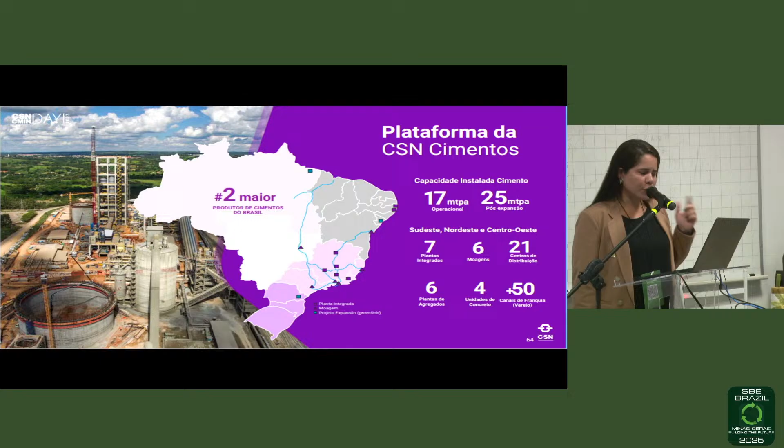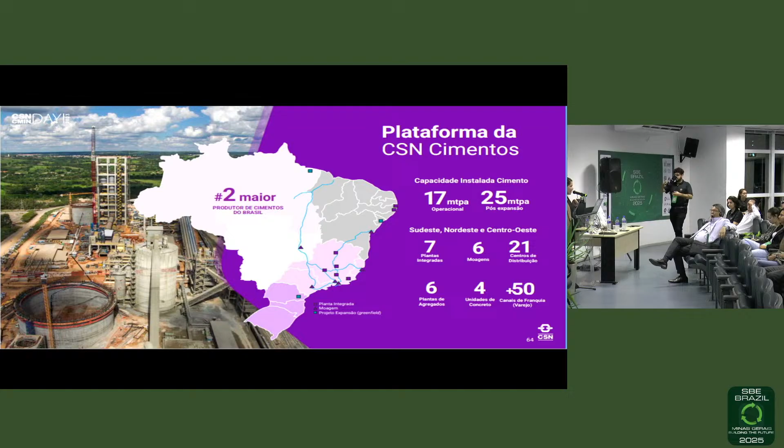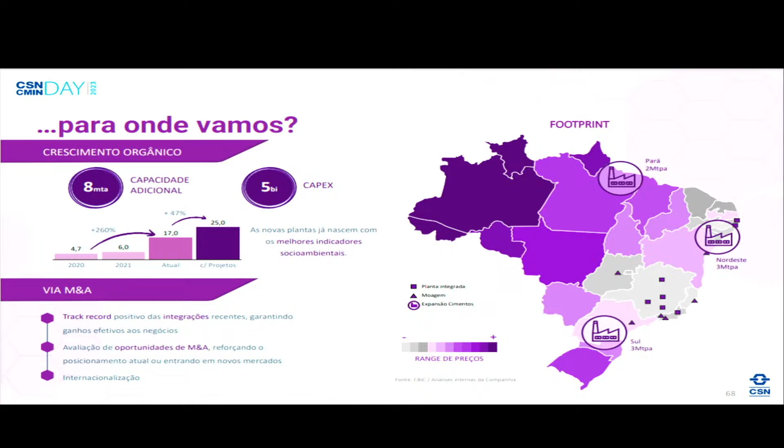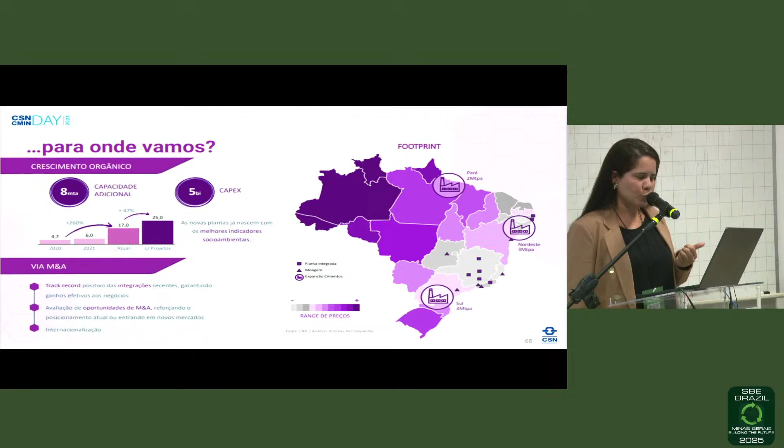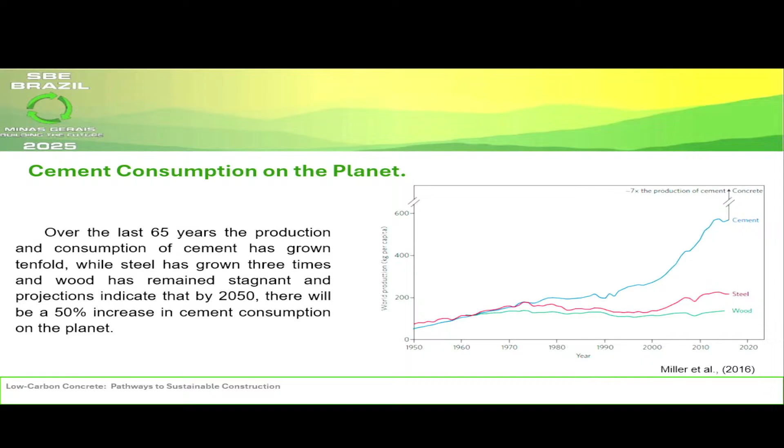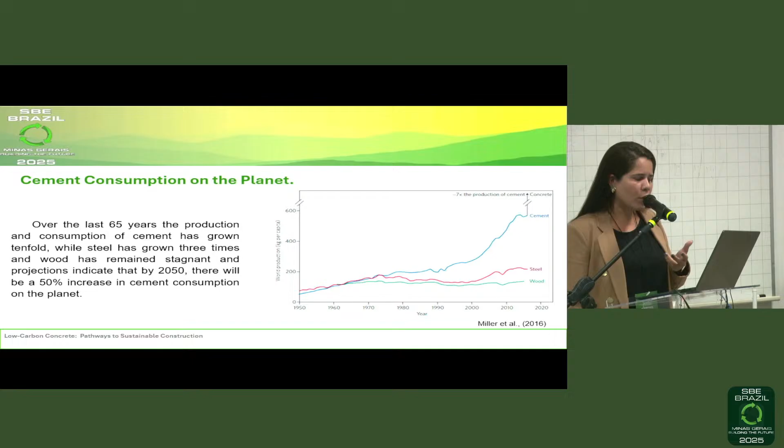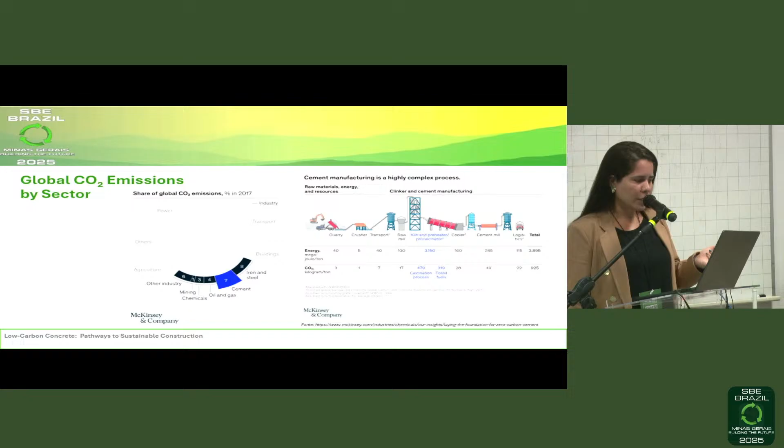Here we have a graph that shows the emissions per segment, the emissions of CO2 per segment, and it shows that the cement segment is responsible for 7% of global CO2 emissions. Mainly, in this case, we're talking about CO2. And this matter of CO2 emission is inherent to the production process of cement.

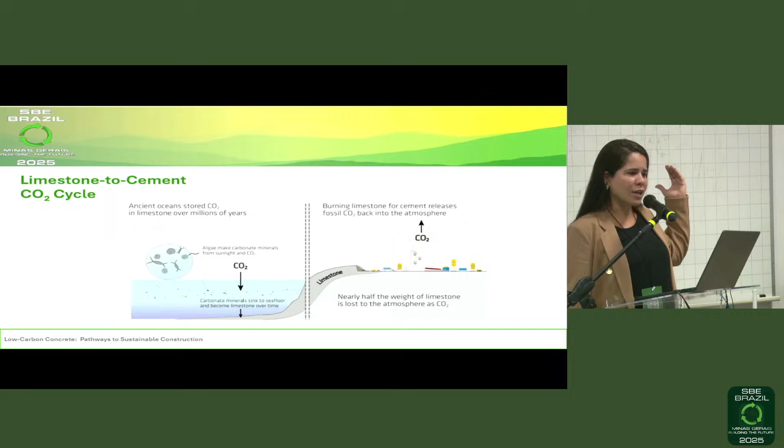For a very long time, algae absorbed CO2 from nature. It was deposited in the seabed, and over time we created layers of limestone. Over time, human beings came and saw that by calcinating and decarbonating that limestone, we were able to make cement. So in the production process of cement, a big part of the CO2 emission comes from this carbonized material being emitted back to the atmosphere.

If you look at this chart, we see that 50% of the emitted CO2 comes from this carbon being released and thrown back to nature. This is very difficult because we have a limitation to reduce these emissions. We have to take attitudes to neutralize these emissions, seeing that nowadays we don't have any other material produced at the same scale as cement to supply the national and the planet's demand.

Nowadays, we do not have another material that's scalable the same way cement is. So nowadays, we're trying to neutralize the emissions that the cement chain brings us.

Data from ABCP shows that 2.6% of total emissions from Brazil come from the production of cement. And we have projections that there will be an even bigger increase in demand for building. Many people are moving to cities, we're developing cities, so there will be an even bigger demand for cement.

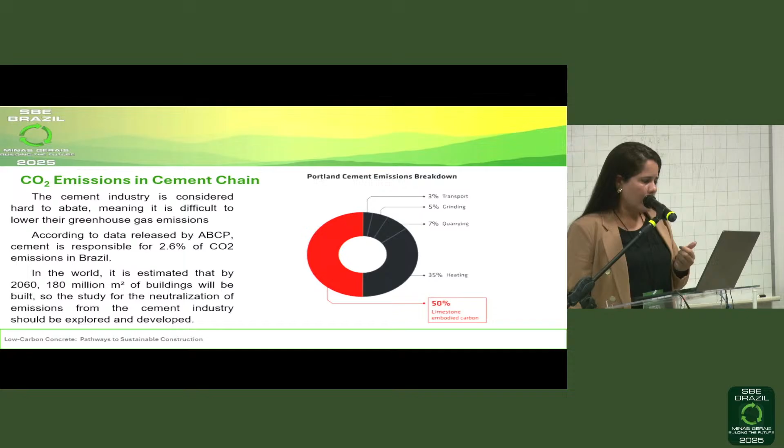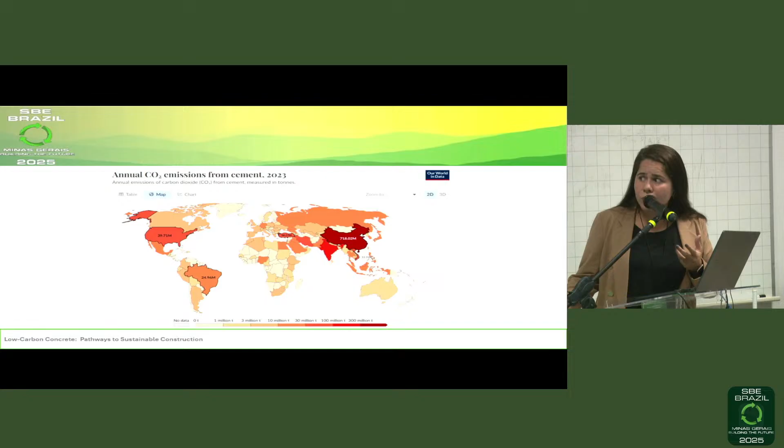Here I bring a chart that shows the density of CO2 emission per country. We can see by territory, it's a little small to see, but here we have Vietnam with much more emission than Brazil, which has a bigger area, mostly because of their energy matrix, but also because of the cement produced there and here. In Turkey, the same thing: it's a much smaller country, but with an emission rate much bigger than in Brazil.

It's not because of that we are not going to do our part, but we are showing in the scenario that we are included. Cement and concrete are essential for a modern society, for the development of infrastructure: roads, bridges, buildings, dams, tunnels.

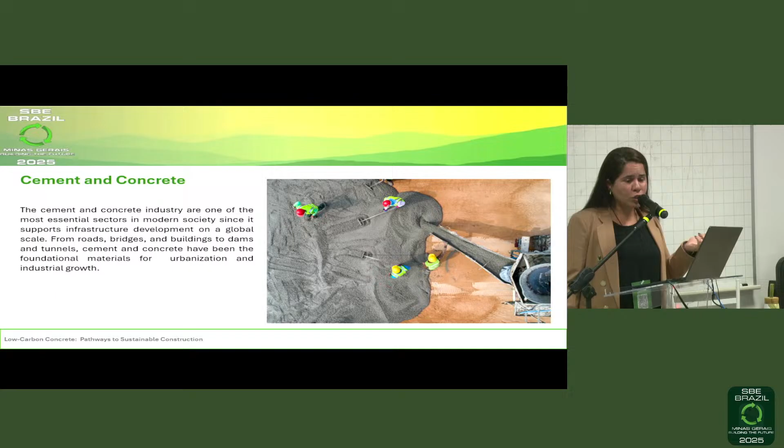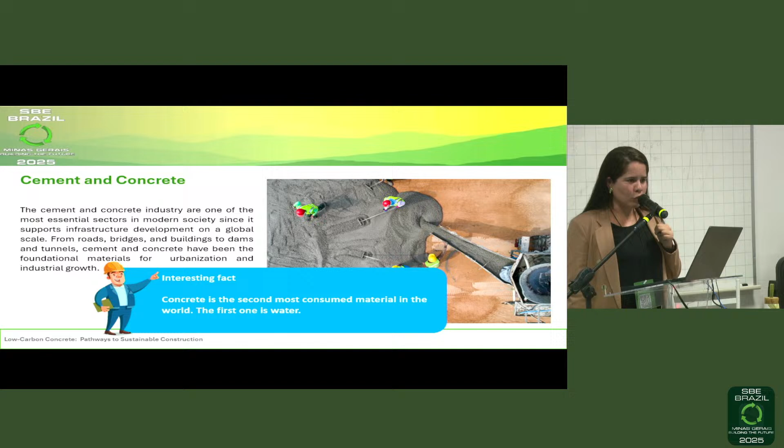Cement and concrete are very important in the development of urbanizing and also in the industrial growing of Brazil and the world. An important fact is that concrete is the second most consumed material in the world, divided by the amount of people. It only loses to water.

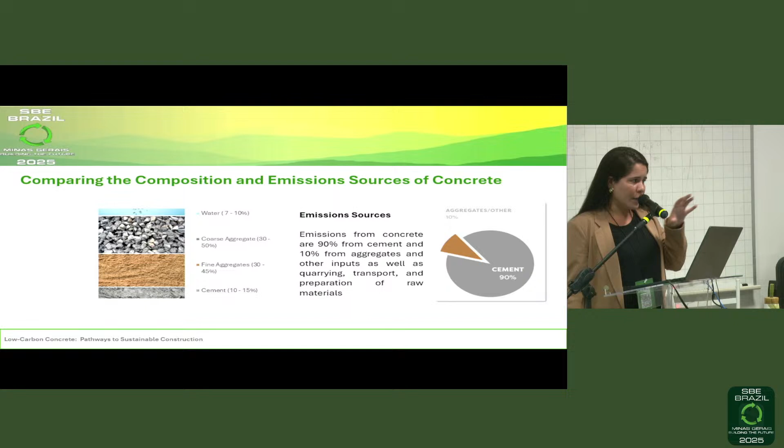Looking at the composition of concrete, we can see that it's basically water, coarse aggregate, fine aggregate, and cement. And 90% of the emissions of concrete come from cement, so the other 10% left are from the other activities connected to obtaining concrete, showing the importance of cement in this whole chain.

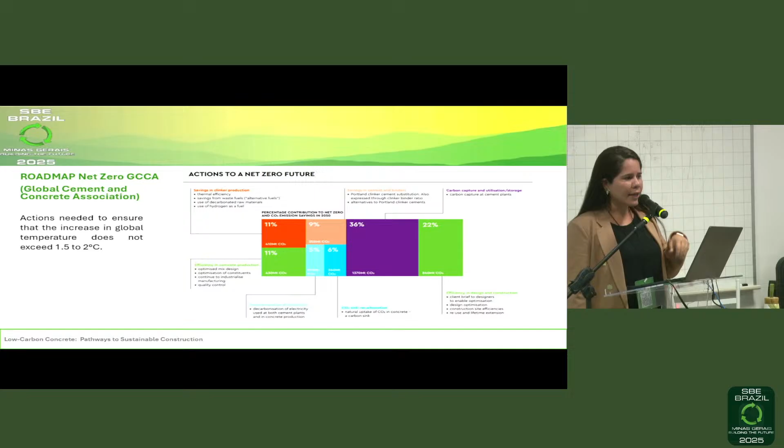Knowing all that, the GCCA, the Global Cement and Concrete Association, created a roadmap in order to identify what actions we need to take yesterday, today, and for some time, in order to neutralize the emissions of concrete and cement. Here we bring some examples that I'm going to talk about ahead, on what actions we need to do to be able to neutralize these emissions that we are not able to reduce.

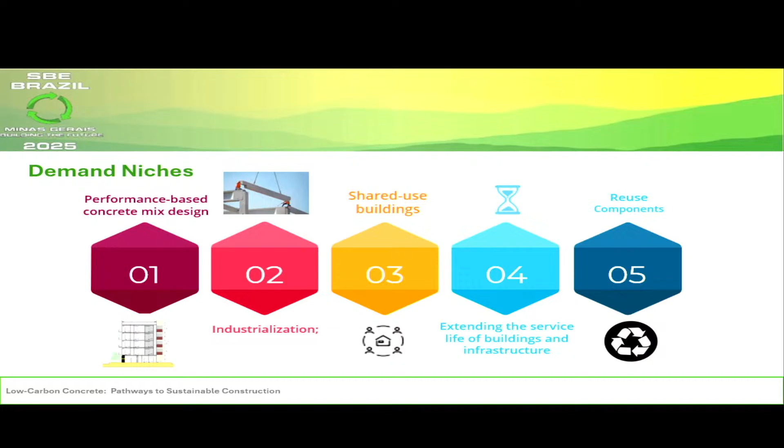In this pathway, we also have some niche demands in order to reach those goals, demands that come from demand and also from the offer. In case I work in a cement company, I work with the offer, but people, companies, industries that use this material also have a very important role.

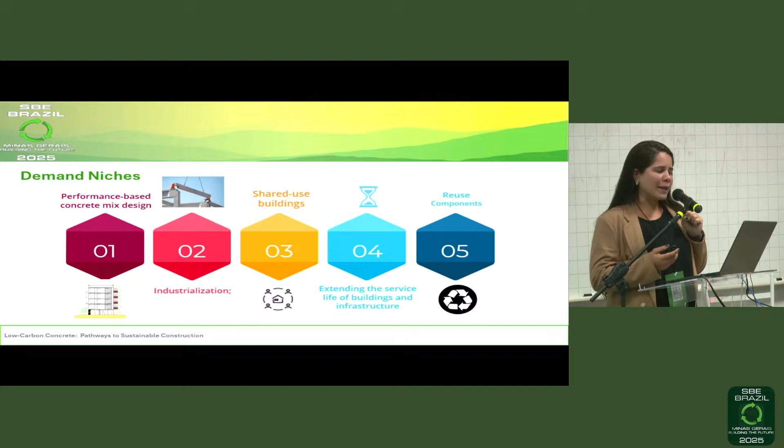For example, the part of dimensioning of concrete by performance, not by use, but by analysis of material to the specific location where this concrete will be used, if it's going to be in a garage with direct carbonation, analyzing and testing the concrete not by strength but by durability, using tests like resistance to carbonation, electric resistance, and also absorption of water.

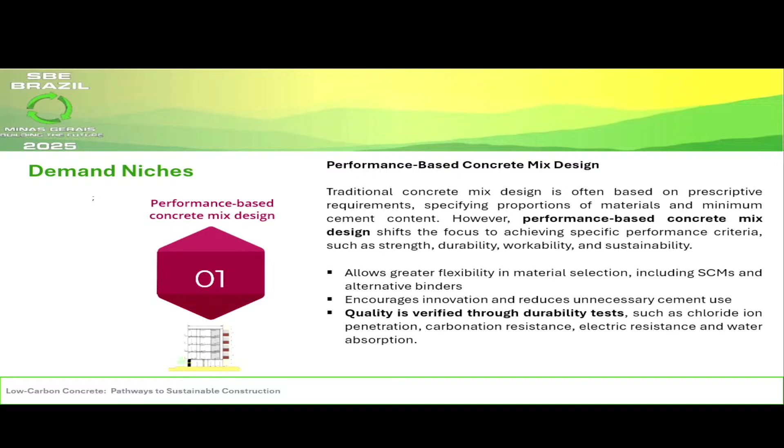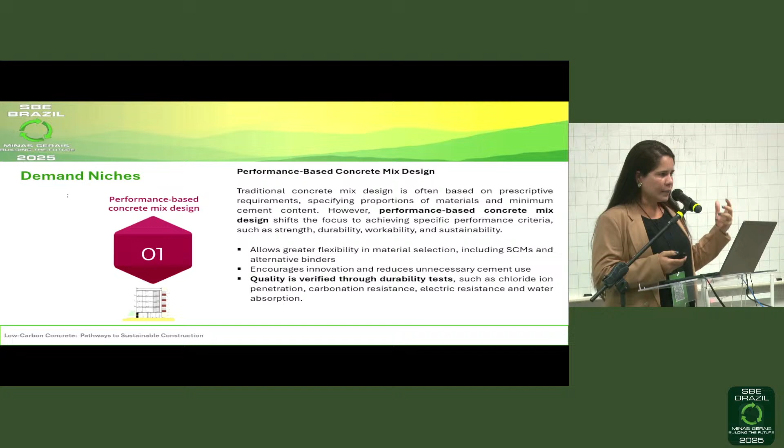In second place, the industrialization. If we work with buildings that are done on-site, we have a lot more possibility of excessive use of material and more generation of waste. If we work with a more industrialized building, we tend to have less waste and emit less CO2, because everything will be well thought out. Taking the operation of making concrete away from the construction site is also important for more sustainable construction.

The builders also have to think about that before they even start the project, thinking about what ways they can industrialize more of their construction to be more sustainable.

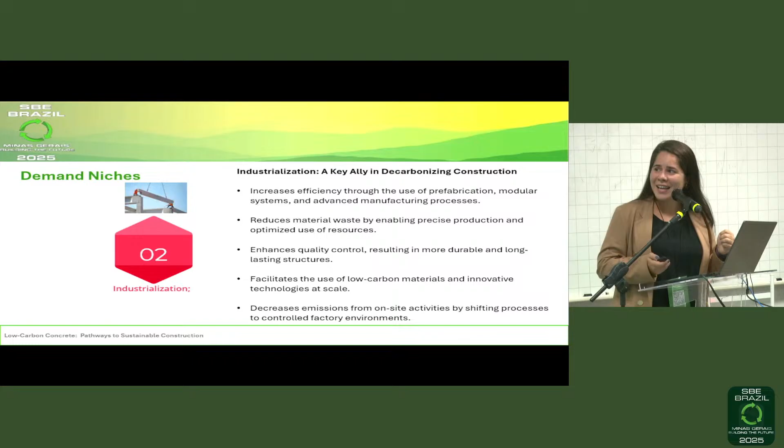I think it was on the wrong slide, I'm sorry. Here I bring the industrialization. I'll talk a little bit about the use of cement bag versus bulk cement.

When we use the bag, we mix the concrete on site. So we have a high use of cement, probably lower durability because most of the time we don't measure anything, lower mechanical strength, increased production of construction waste, and low or no control on site, not as much control as in industry. Then we have higher emission of CO2 per structure.

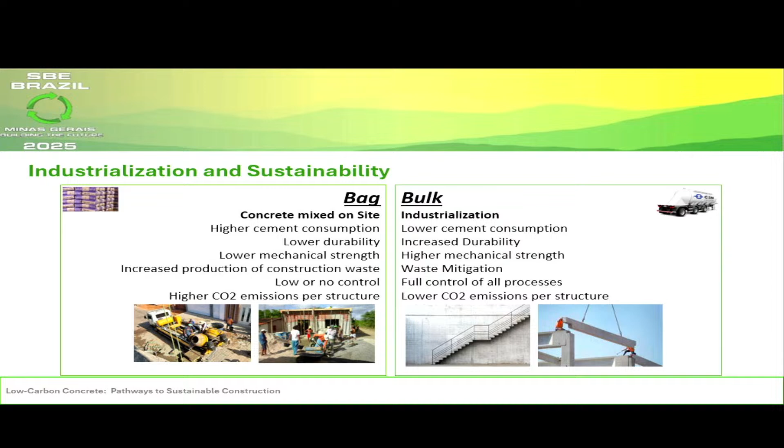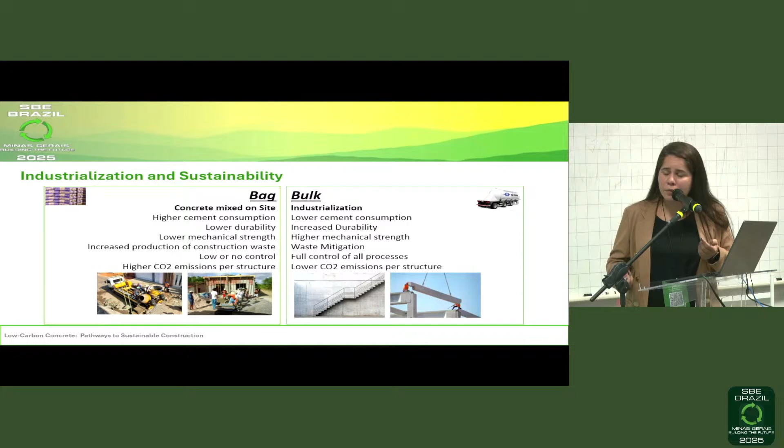When we work in an industrialized environment with bulk cement, we are able to have lower cement consumption, increased durability, higher mechanical strength, and we are able to mitigate waste. We have full control of the whole process because we automate everything and implement those processes in the industry. This way, we are able to lower CO2 emissions per structure.

Regarding the supply niches, like the ones I act in, companies need to see key points, for example improvements in energy efficiency of their units. Old units need to be improved, new units make everything easier, but we have to improve old ones too. A reduction of the clinker to cement ratio, increasing our proportion of supplementary cementitious materials, the use of low carbon fuel or admixtures to reduce water content, and the reduction of cement, as well as carbon capture, utilization, and storage, which is just capturing CO2 from big polluting sources, purifying it, storing it, and then giving it a destination, which could be storage or use, which I'm going to talk about ahead.

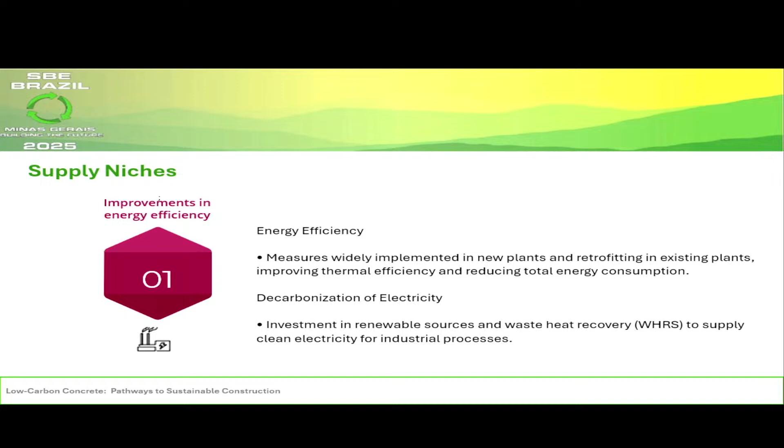So, talking about energy efficiency, we need an extensive revamp on those old plants and also decarbonize electricity. In Brazil, we don't have this problem as much. Our energy matrix is very clean. The company I work for, and others I work with, generate energy from their own dams.

But that's not the case from other countries, which need to work on that point, the decarbonization of electricity.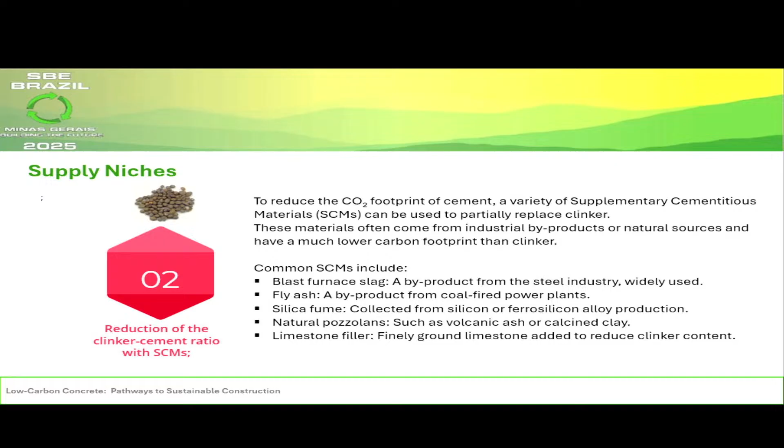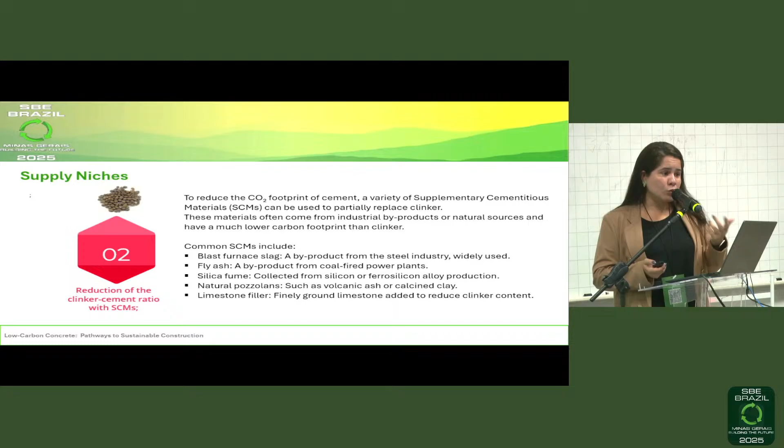The use of supplementary cementitious materials includes slag from blast furnaces, fly ash which is a byproduct captured from coal plant units, silica fume captured from electric arc furnaces, natural pozzolans which can also be calcinated, and limestone filler, which can become a good aggregate to cement to improve characteristics and reduce emissions.

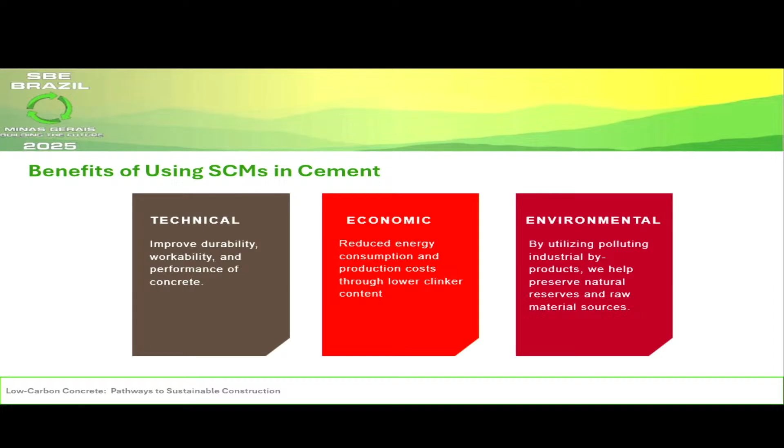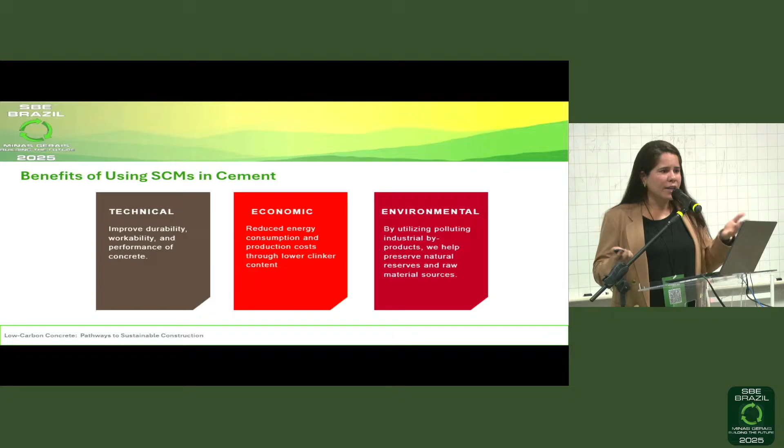What are the advantages of using this? There are technical advantages because they improve durability, workability, and performance of concrete in the final product. There are economical advantages because it reduces energy consumption and production cost through lower clinker content. And there are environmental advantages because instead of consuming raw material, we reduce raw material use by adding another component that's already available — something that could be a problem becomes a solution for us.

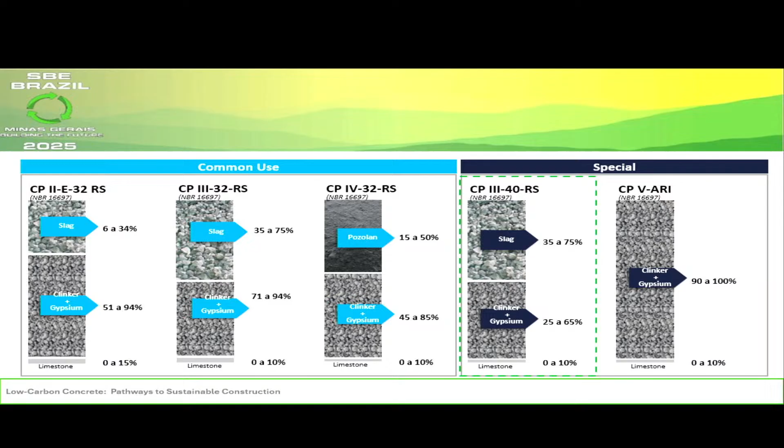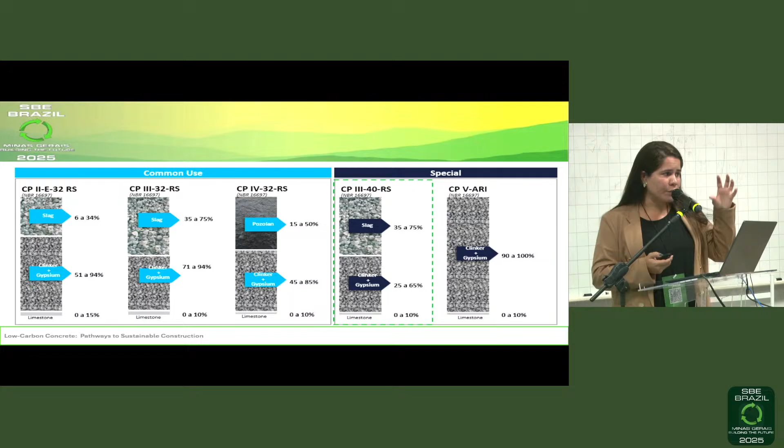Here is an image showing the composition of some common cement types supplied in Brazil. I'll highlight the blast furnace cement, CP III-40, which has 35 to 75% slag in its composition and could have 25 to 65% clinker. So you see the reduction possible in this type of cement if you use slag properly, while still having good cement for your region, significantly reducing CO2, since most emissions come from clinker.

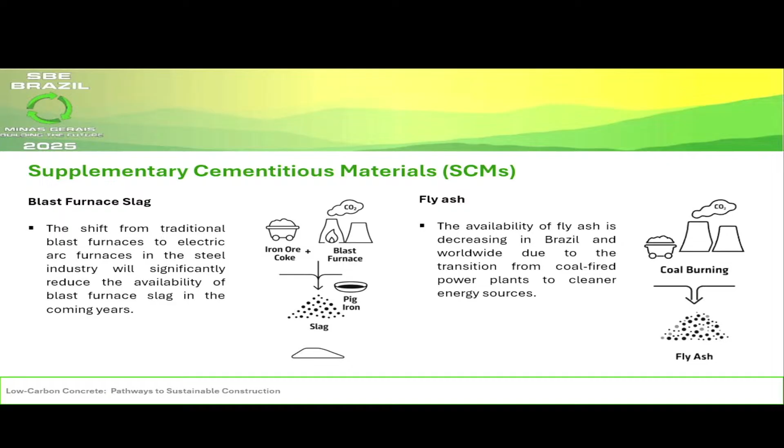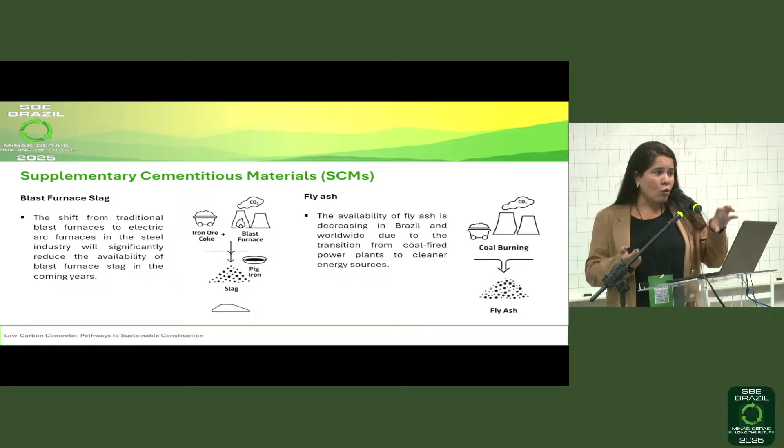The slag is amazing — I am a fan of blast furnace slag. It brings benefits that cement wouldn't have without it, but we have problems because the steel industry is improving its sustainability. They're not using blast furnaces anymore. Most of those furnaces are being turned off, and they're buying electric arc furnaces where we don't collect slag. So as years go by, we will have less available slag. Nowadays it's not a problem for us, but it could be in the future.

Fly ash will also be a problem because we won't have coal plants. In Brazil we have other energy sources — we're building a lot of wind power. So many things are happening that will reduce the use of coal plants, because they're not smart when we think about sustainability. In the Northeast, I used to work with fly ash, but it was very seasonal, because they only turn on coal plants when we don't have energy from other sources. So as time goes by, we end up having a reduction in the availability of these two important raw materials.

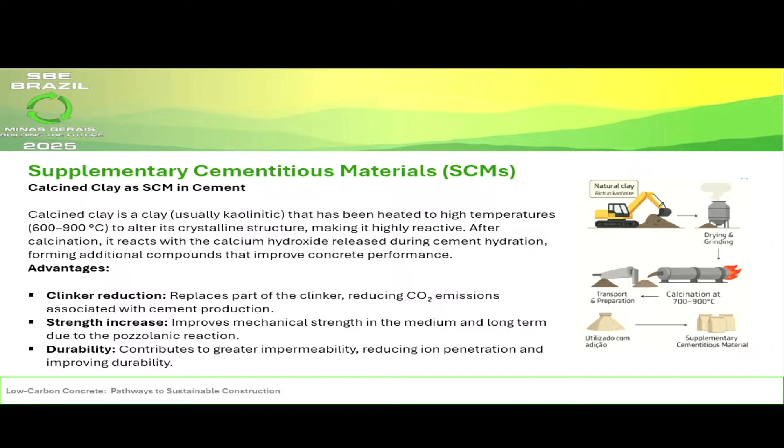So what do we do? We need to look for other supplementary materials — for example, calcined clay. If we find a good source of kaolinitic clay, we can use this material well. We can treat it and use it with cement because it interacts with calcium hydroxide and increases the resistance and durability of concrete. This isn't a material that enters inert in the composition — it increases durability and strength.

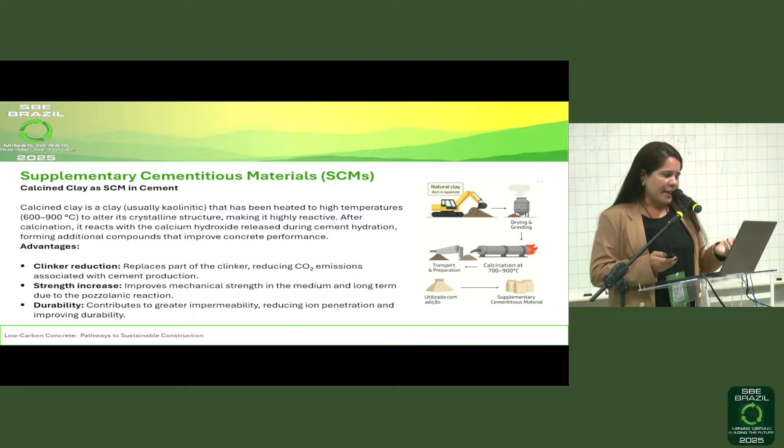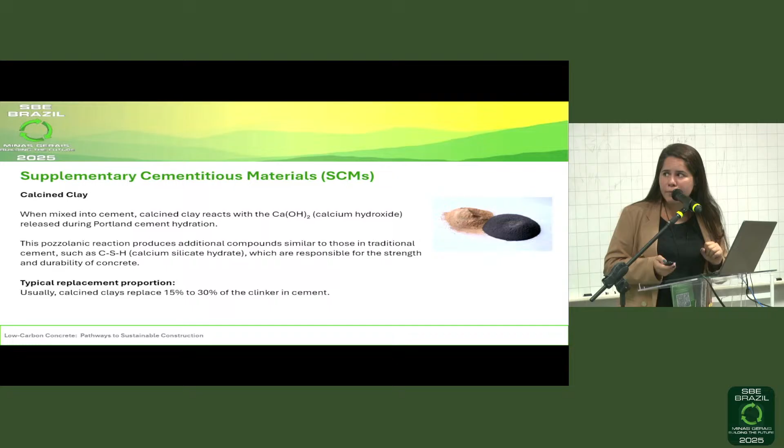Nowadays in Brazil we don't work with this type of material, but there are other cement companies that do, so that's an alternative. We usually work with substituting 15 to 30% of clinker using calcined clay.

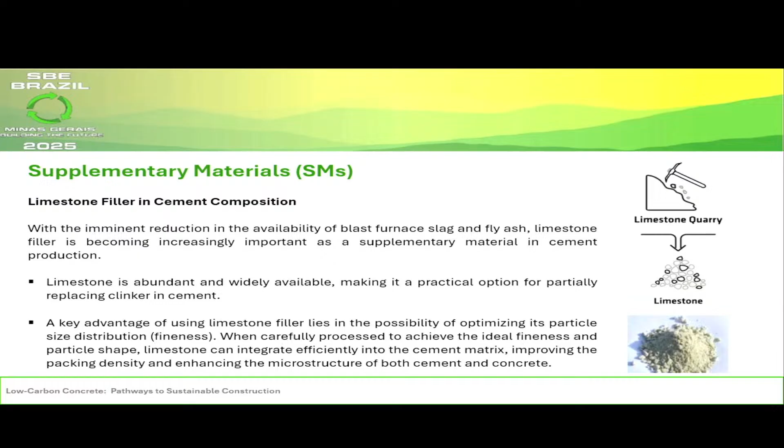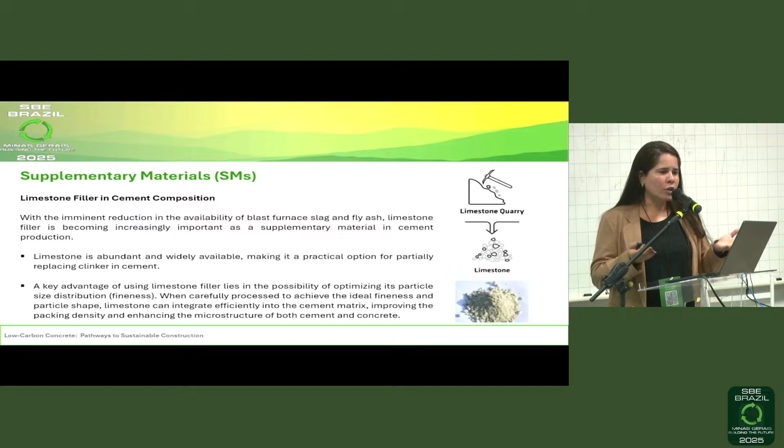We also have limestone filler. Everyone that has a cement factory has a limestone quarry, and if you work on the grain size, you can get a much better result. Nowadays there are many studies worldwide on the granulometry of separated materials in order to get the thinnest material, because clinker and limestone are different. If you put everything in the mill together, as is done in Brazil, we don't extract the best grain. So if we do separate grinding — and there are many relevant studies on this theme — it's very important, and it allows us to develop cement with more limestone filler without losing performance.

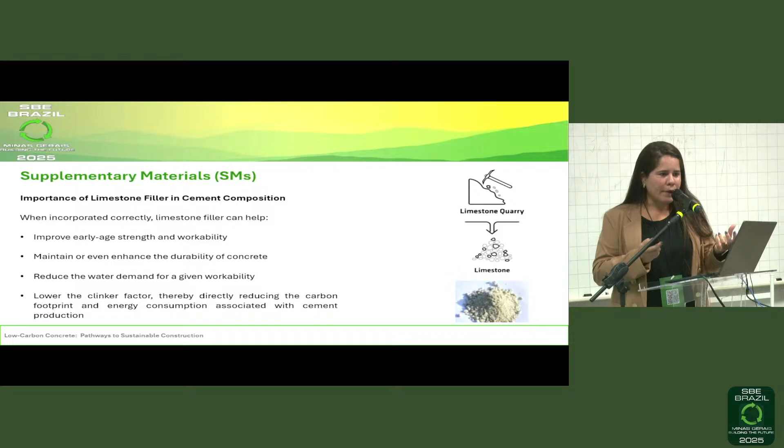This is what I meant earlier — if we add limestone filler, we can do more. We're not going to add problems to that cement, but solutions, because it will have less CO2.

Another area for suppliers is the use of alternative fuels, including hydrogen. There are many projects at the company I work for regarding green hydrogen to use as fuel for various operations. So it's a very interesting theme.

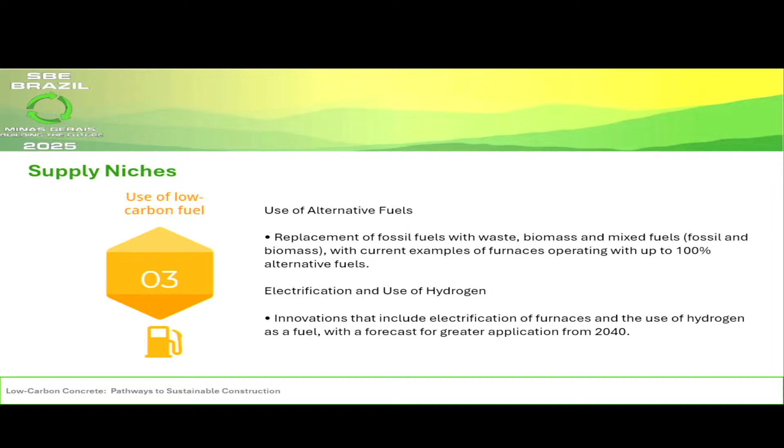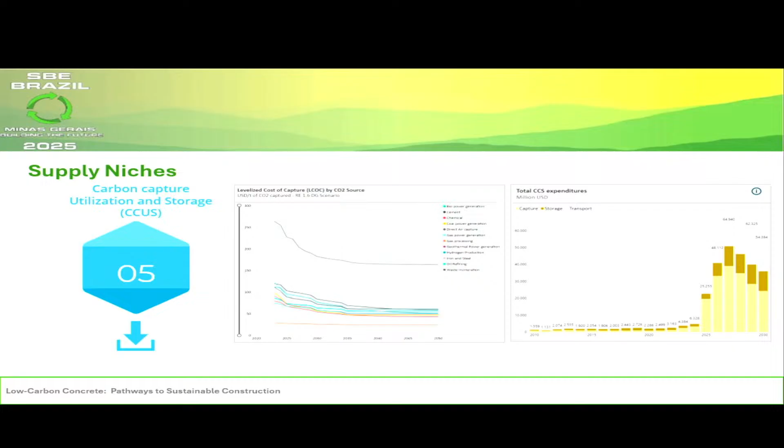We also have CCUS, the capture of carbon, use and storage. The graph is very small, but here I show cost. The capturing of CO2 can be done directly from the air, which has the highest cost. And we also have other sources where we just capture CO2 from other sources who are polluting.

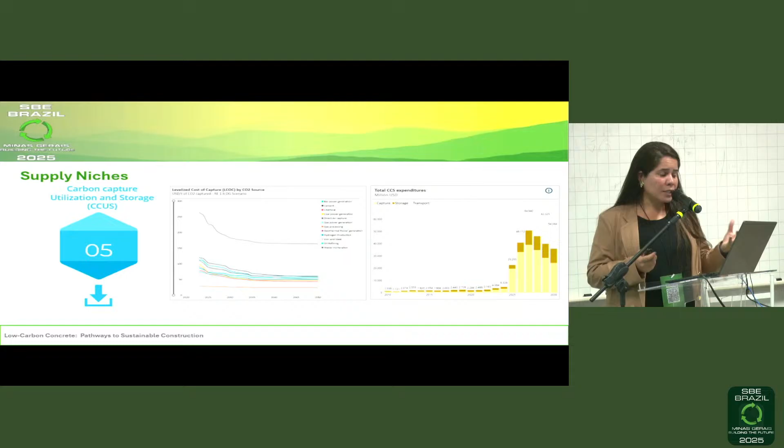This is still a process that is very demanding, and we see that these processes are working in other countries, but they have grants and governmental funding. So to apply this and to make it more feasible, we need the support of the government to help us incorporate this sort of project, this in a pilot project, and then do this in large scale, which is an alternative. And through the roadmap, this represents 36% of our goal of reducing and neutralization of CO2.

So this is a very important part of the process. If we don't invest in study, we will be left behind. I already went to some companies abroad, and we saw that the average is $70 to $100 per ton of CO2 captured. We need to capture, purify, storage, and then distribute. So there is a whole process to do that. So nowadays, we don't have any project ongoing because of this high cost and this lack of incentive from the government up to now.

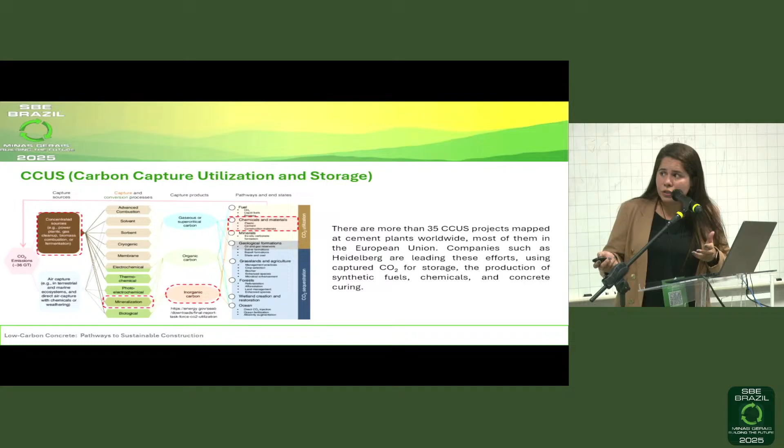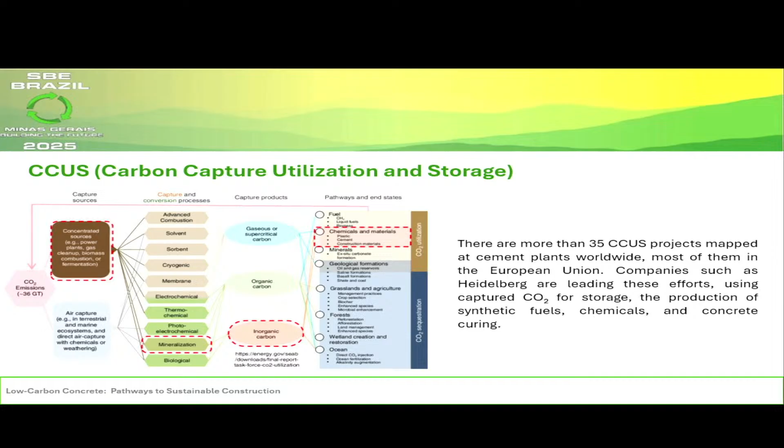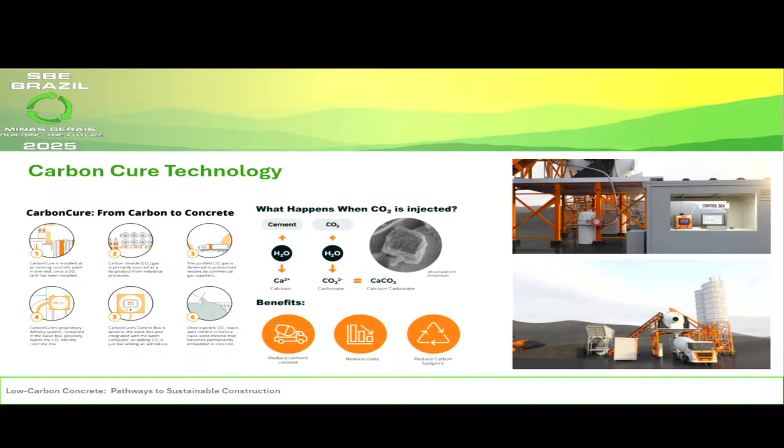Here I bring some examples of the use of CO2 capturing. There are many applications. Our applications would be here in the area of instruments that we can use, treatment of material, incorporation in concrete, which is the case of Carbon Cure. Carbon Cure is a patented Canadian technology where we inject CO2 inside the concrete truck.

What happens with the CO2? When we have the hydration reactions in cement, we have the incorporation of this material as calcium carbonate in the cement matrix, which will make this matrix more dense. It would increase in strength and durability and reduce the use of cement, the amount of cement. So we use less cement and have the same durability, bringing benefits in the reduction of CO2 to the concrete.

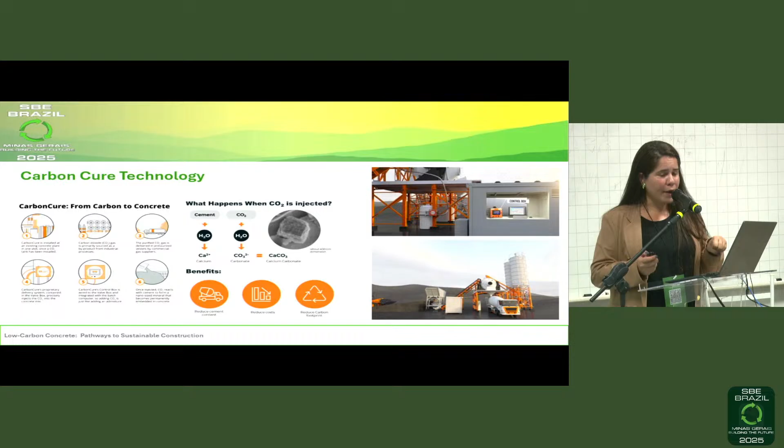So this is a project that we will start a pilot this year using CO2. But in this case, we will buy CO2 and we will incorporate into concrete. We won't do the whole process. We won't do the capture, purification, processing, and distribution. We will buy first, and then we will start this work reducing the load of cement in the operations of concrete.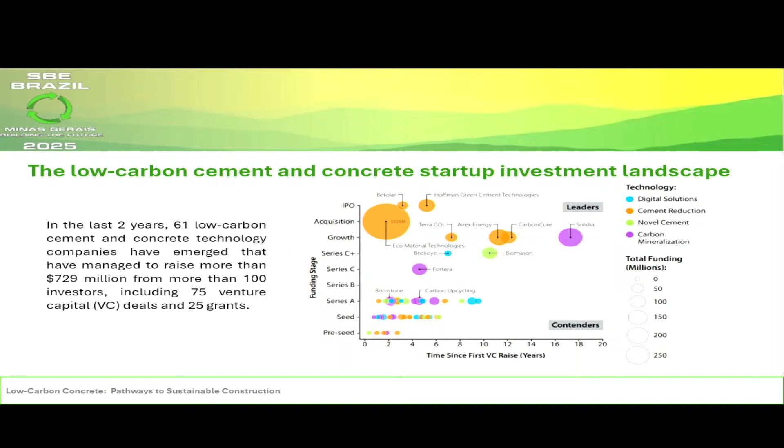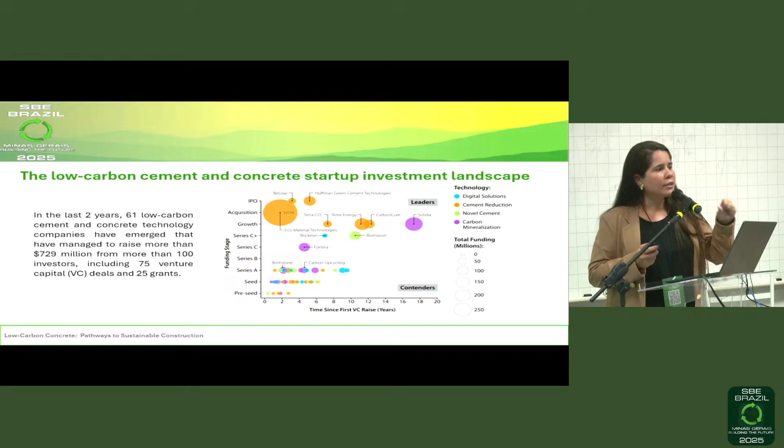Here I bring some startups, some companies that are focusing on this part of reducing the carbon footprint of concrete. Some in very early stages, others with high investments, and they are working hard, like Solidia, Fortera, CarbonCure, Terra CO2. So these are companies that are studying and taking this to many other countries, and they're also having contracts with some companies so that they help this reduction of the CO2 footprint in the cement and concrete industry.

Looking at detail, Carbon Cure uses CO2 mixed in the concrete. Carbon Limit uses an activator to increase the carbonation of concrete. There is Neustark, which is Swiss, that also uses this material to carbonate. There is Carbicrete that cures blocks with CO2 in industrial residues, and also Carbon Built that also cures blocks with CO2 chambers.

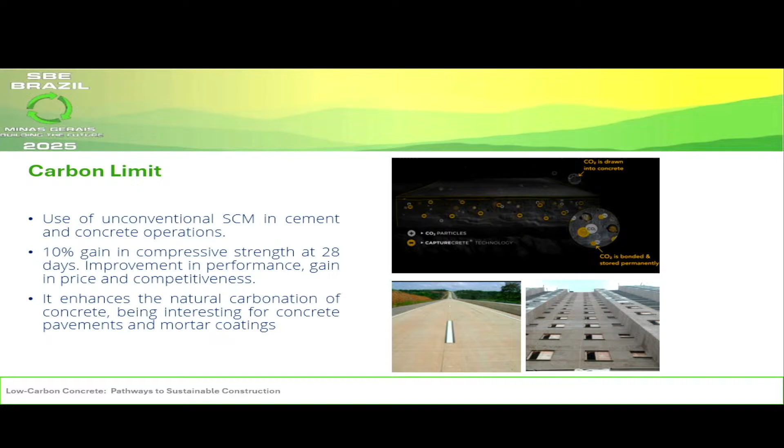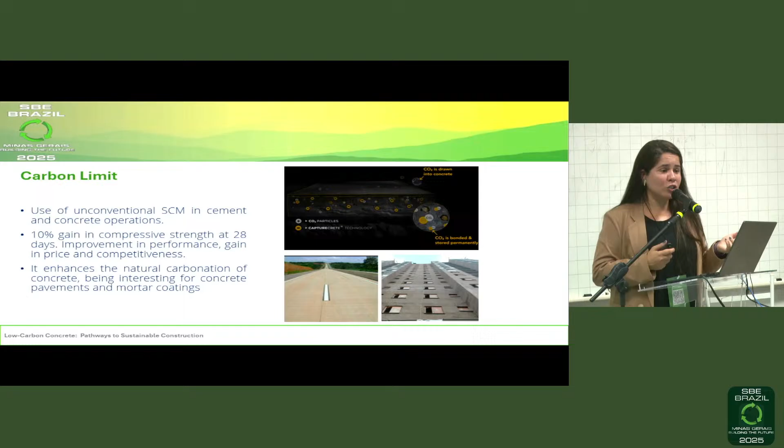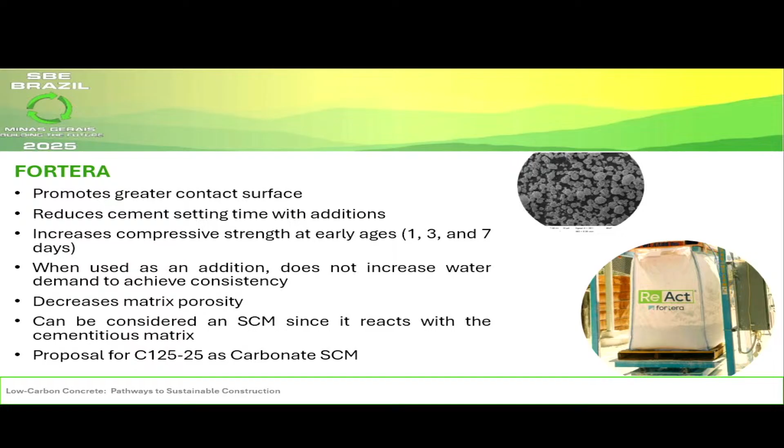There is also Fortera. Fortera is a company that I visited in San Jose in California, and they treat fill limestone in CO2, and they transform this material from inert to reactive material, and it becomes an addition to cement. And it is being studied in one of the norms in the United States, C125-25, to become an SCM. Why? Because it has reactivity. So this material is being studied.

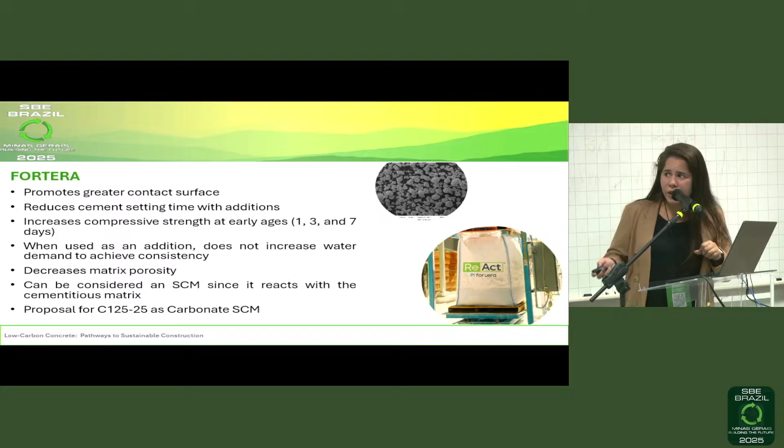It's a patent that treats this fill limestone. It is a widely available material treated with CO2, and it transformed the mineralogy of the material.

The natural carbonation also needs to be measured because our structure elements are being carbonized over time. So why don't we measure the rates of fixation of carbon in our structures that are apparent?

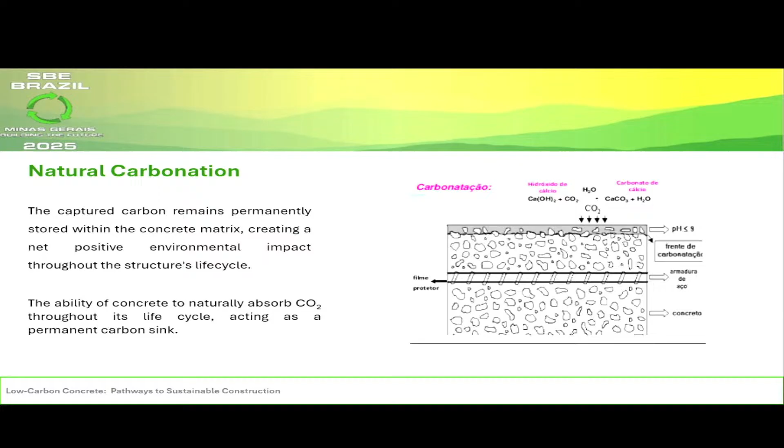When we make the outside part of a building of 25 floors, we have rules in civil construction. We need to wait 14 days of cure. In 14 days, this part is already carbonating. What's that amount? What's being fixated? We still need to account for that and put it into the math.

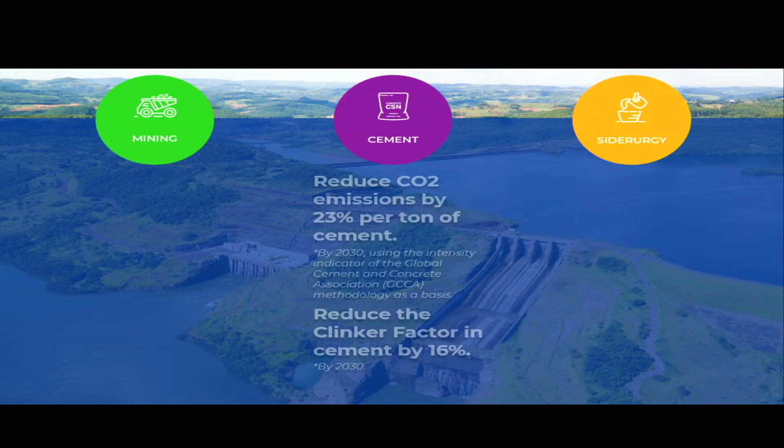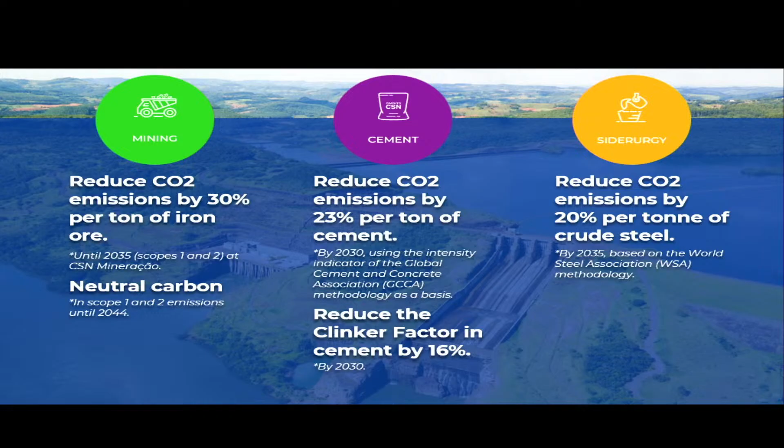This is important. We also need to account for the whole production in the chain, even for the material that's applied. The CSN has its own goals that are important for steel, cement, and mining. We have the goal of reducing 23% per ton of cement by 2030, and a reduction in the clinker factor in cement by 16%. We also have a goal from mining and siderurgy.

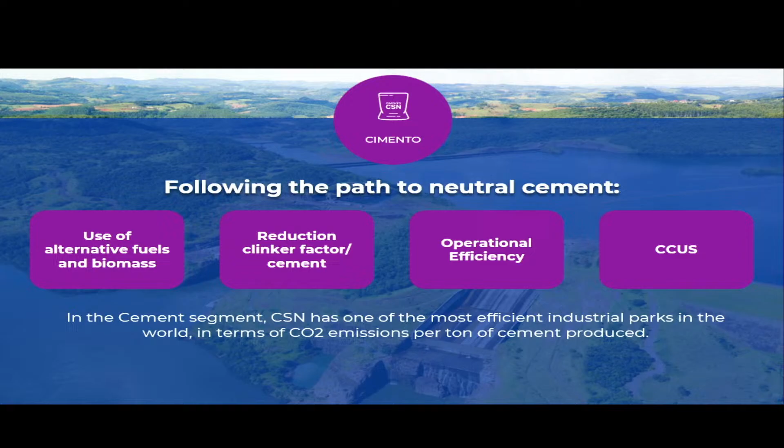In cement, we are using alternate fuels and biomass. There is a reduction in clinker factor in cement. We have operational efficiency and works with CCUS, as in carbon capture.

Of course, there are limits depending on the type of building. So this cement might not give you the same quickness as in an industry of prefabricated construction. All of this needs to be taught in engineering.

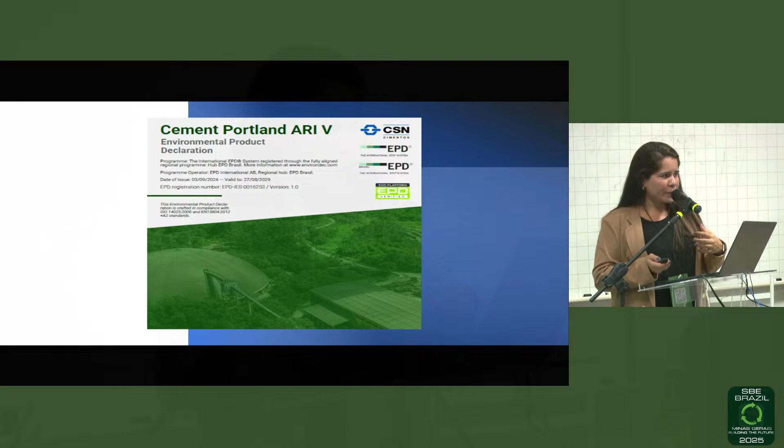We are also emitting EPDs, which will bring data regarding emissions of all our products, data that is validated. It's not data that we want to show, it's validated data, validated by international organs, agencies, because we need to measure where we are so we can see where we can improve our products.

On top of that, we also need the support of government legislation that supports this type of business and the evolution of the supply chain, because we know the price is king. For example, when you buy concrete for a construction, if we have laws that help us, we will move forward much faster.

So the solutions of low carbon will need to compete economically with traditional concrete. So regulations and agencies have an important role in going towards less emissions and less impact.